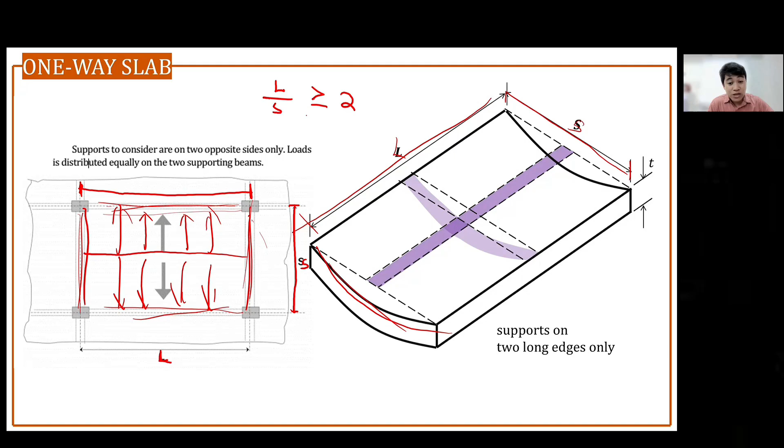Again, L over S is greater than or equal to 2. If that is less than 2, we call that a two-way slab.

My technique, to easily identify without measuring the distances, is by just looking at the panel - you can easily identify if it's a one-way slab or two-way slab. For example, you have this panel, supported on all sides by beams. All you have to do is create two squares within that panel, where the dimension of the square is the shorter span.

For example, I'll draw two squares there. Once you've drawn two squares and there's still some space left over, that is a one-way slab - the longer span is greater than the shorter span by 2. So that's the technique - by just looking at the slab panel, seeing the flooring above, you can easily identify if it's one-way or two-way slab. Check if two squares fit. If yes, that is a one-way slab.

If it doesn't fit, for example like this slab, you try to draw two squares. Here's one square - this is our slab, supported by beams. Then you try to draw two squares and if the two squares don't fit, that is a two-way slab, because the load distribution is different - it's not just one-way load distribution. If we have a two-way slab, this is the load distribution.

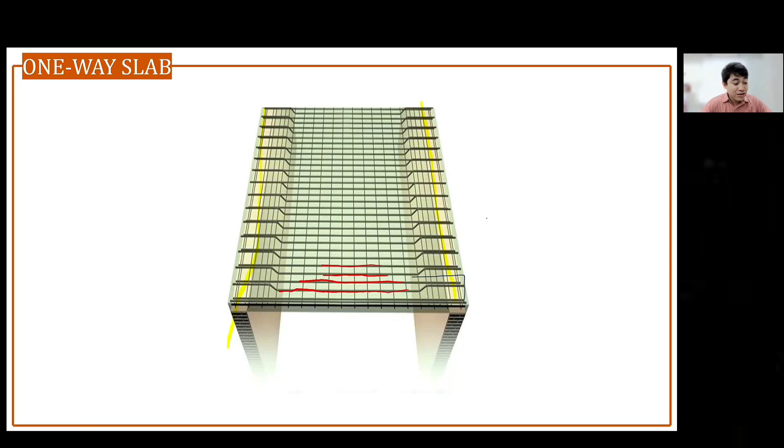This is how we put and detail the reinforcement in our one-way slab. As we can see here, this is what we design - the main reinforcement. As we cut this section, or as we cut this section, we can observe that the main reinforcement is located at the bottom.

However, if you are going to cut this section at the support, you can observe that the reinforcement is located at the top. Why? Because a slab behaves as a beam - same behavior. You'll see it deflects like this. From our understanding of reinforced concrete beams, when it deforms like that, the tension is at the bottom, so you have to provide reinforcement at the bottom.

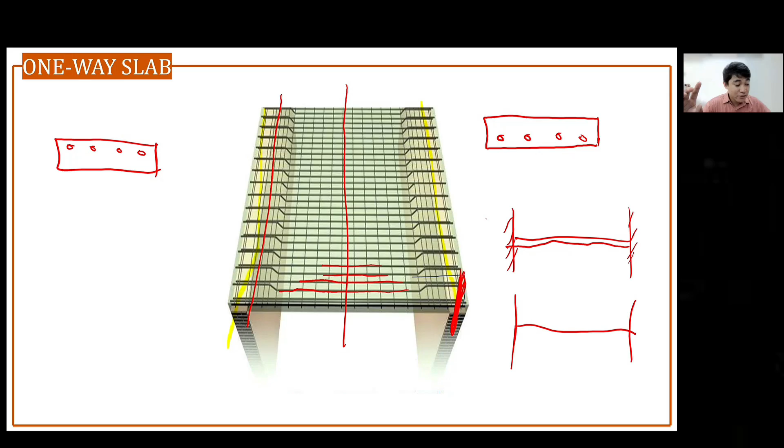At the support, if that is continuous on both sides, it's not simply supported, thus it will act as a fixed support if it's rigid. So for a fixed support, let's say we have this beam - this is the moment diagram of that beam. Negative at the support, negative at the support, and positive at midspan. For a positive moment, this is the deflected shape - the beam is happy. For a negative moment, the beam is sad.

So that's why we provide the reinforcement at the top - top sa support, bottom sa midspan. Similar to the beam behavior. Actually, we're just analyzing here a beam na sobrang haba, as you cut this section parallel to the longer side, para kang nag-a-analyze ng beam na sobrang haba ng kanyang width.

And then you have the total depth of the slab, which is the thickness of the slab. So our goal here is to identify the thickness of the slab and the main reinforcement na dapat natin gamitin for this slab. And this main reinforcement, hindi bilang ang tinitignan natin, the spacing - the uniform spacing of this main reinforcement.

Now let's try to solve this sample problem. So we have here a floor system shown, support the given pressure loads using approximate analysis. Later on, I'll explain what is approximate analysis. For the design loads, design all one-way slab with S1 bounded by the grid CD. Fortunately, these are all one-way slab because if we are going to calculate the L over S of this slab, 8 over 3, that is more than 2.

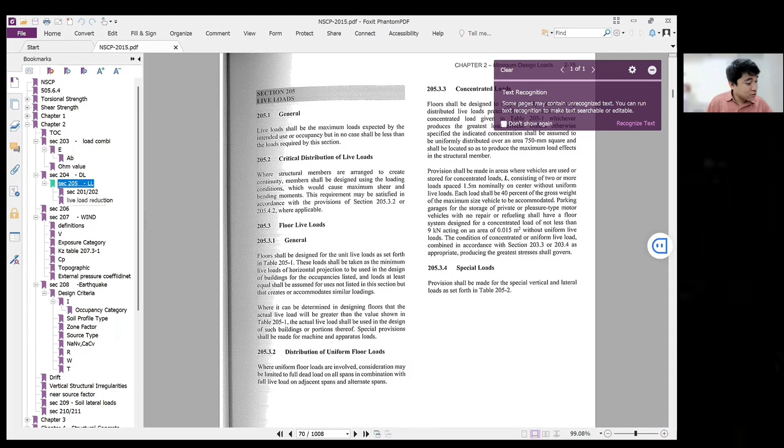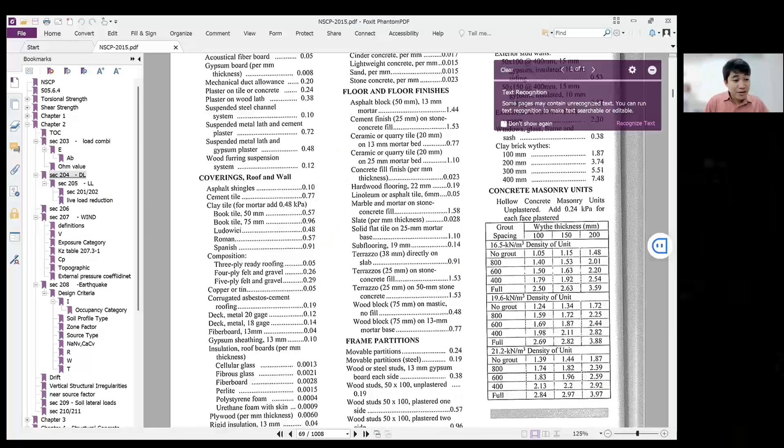Meron tayong section 204, the dead loads of the NSCP. Halimbawa, the finishes na ginagamit natin - dito yan, the floor finish. Let's say you use asphalt block on your floor finish, your cement finish, 25 mm on stone concrete fill, ceramic quarry tile, you use tiles. So you use ceramic or quarry tile on 25 millimeter mortar bed. If I'm not mistaken, yun natin ginamit ko dito for the floor finish - tiles. So you can use 1.1 or kung ano man yung specific na gagamitin mo doon sa slab mo, kung ano mismong finish.

So, you have the ceiling. Nandito yan, yung mga ceiling weight. Let's say you're going to use gypsum board per millimeter of thickness, kung ano man yung gypsum board na gagamitin mo. So, you multiply it to the thickness, so you have the load in kilopascal. These are in pressure loads, evenly distributed on the entire slab.

Next we have the electromechanical, though it is not particularly identified doon sa NSCP natin. So, this is the usual value of electrical and mechanical ducts na pwede nating ilagay dito. Usually ranges from 0.2 to 0.5 kilopascal, pero depende pa rin yan doon sa type ng structure na gagamitin niyo.

So, 0.2 kilopascal is a reasonable value. Concrete unit weight is mentioned in the NSCP, in kilonewton per cubic meter. The slab is concrete, so it has its own self-weight. As mentioned in the NSCP, the unit weight of reinforced concrete, stone, including gravel, is 23.6. I used 24 kilonewton per cubic meter in the problem.

Then you have the live load. If you're not sure what the purpose of the area is, you have to check the architectural plan to see the purpose of your slab area. So you go to the live load table and identify what the area is for.

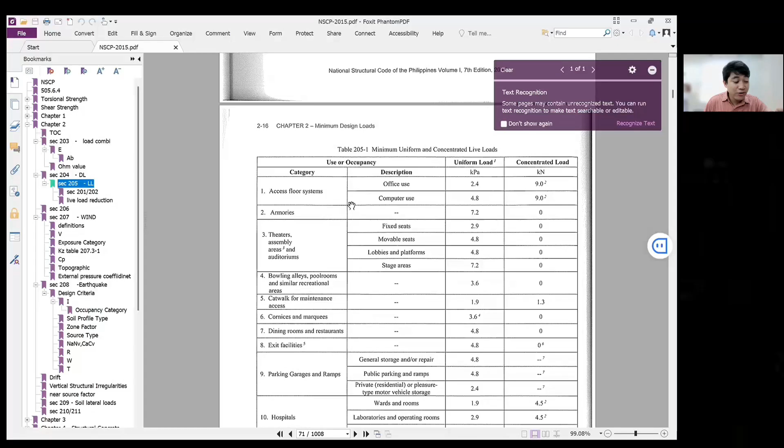For example, if we are designing a hospital, for wards or rooms, you have to put 1.9 kilopascal live load. This is the live load, the moving loads that are not permanently attached to the structure. Dead load is permanently attached, like the self-weight of concrete, the tiles, the ceiling, the electromechanical - those are dead load. But live loads are not permanently attached to the structure.

So check the NSCP for the values. For laboratories, it's 2.9 kilopascal. So that's how it works - we used 2.4 kilopascal here. The beam size given is 300 millimeters by 600 millimeters.

So now, how do we start our design? First, let's identify the minimum thickness required by the code for a one-way slab. So how can we identify the minimum thickness?

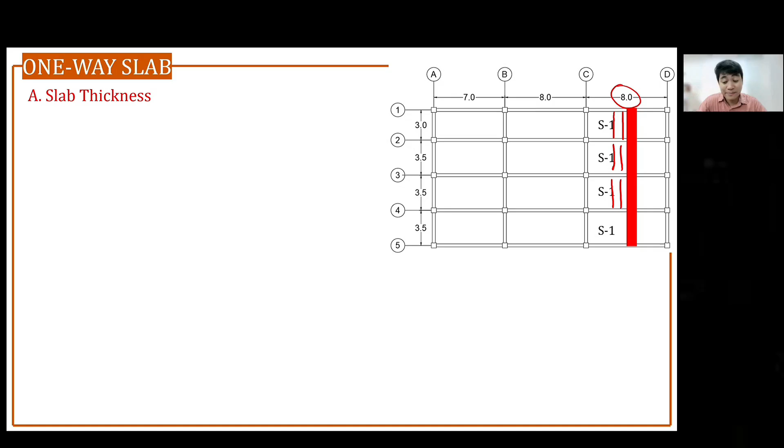Let's get a strip - this will be our reference, a strip parallel to the shorter span. So we analyze this strip. You just get a strip because that is a long slab, 8 meters. Take note, parallel to the shorter span, and that strip will be your reference for your minimum thickness H.

This is what we need, the L. So that L, if we have a simply supported slab - what do we mean by simply supported slab? A simply supported slab is a panel with no adjacent panel on both sides. Let's say this is our panel, this is the shorter span, with no adjacent panel on either side.

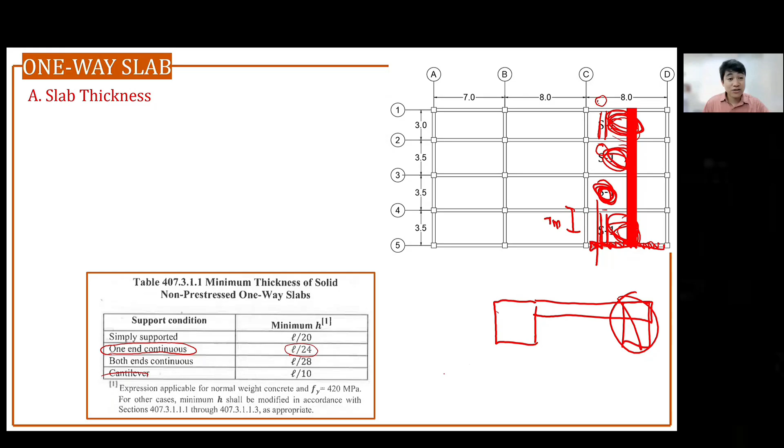This usually happens with balconies where we don't put support on the other side. But the span should be short - usually 1 meter. If it's longer, like 3.5 meters, you have to put support again or a beam on the other side because the deflection will increase. We also calculate the deflection for this, similar to a beam.

So with that, let's identify the minimum thickness of each of these slabs, starting with the one end continuous. The formula for one end continuous is L over 24. What is L? L is the length of that strip, center to center of the beam.

Okay, so that is your L. We also need the L over 28 for both end continuous, and L over 24 para dito. So let's identify, kasi parehas itong kailangan L over 24. Itong dalawang slab na to, they are just similar slab kasi parehas sila ng dimension, parehas pang continuous yung end nila, both end continuous. So isa na lang ang computation natin dito.

Parehas lang naman nabibigay ng result. However, these are discontinuous slab, ito rin ay discontinuous slab, pero magkaiba sila ng magiging L. So let's compute their thickness separately. Unahin natin to.

In millimeters to kasi thickness na makukuha mo dito should be in millimeters. So let's use millimeter na dimension for 3 meters. So that will be 3,000 divided by 24. Dito naman, that is 3,500 divided by 28. And this is 3,500 divided by 24.

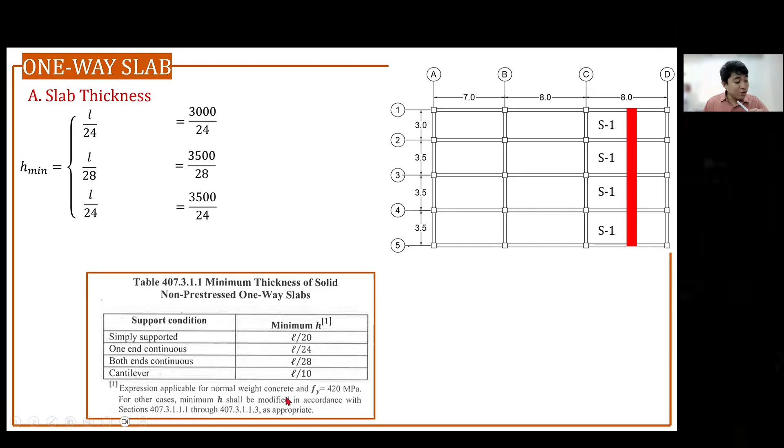Pero hindi pa natatapos yung formula natin dyan dahil may note tayo dito. So for expression applicable for normal weight of concrete and Fy of 420. However, if you are not using 420 megapascal to be exact, your H shall be modified in accordance with section 407. Ito yon, so may multiplier pa tayo, Fy other than 420 megapascal.

Ano ba yung Fy na ginamit natin? We're referring here to the main bar na gagamitin natin parallel to the short span. Take note, ha, the main bar is parallel to the short span. Yung Fy natin is 345 megapascal, hindi 420. So thus, we're going to use this multiplier, i-multiply pa natin yan dito.

Okay, so ito yung magiging final formula natin for the minimum thickness of the slab. Multiply natin, so 0.4 plus Fy over 700. Okay, so answer, pitin natin isa-isa. So we have 111.607, this one is 111.607 din, so they have the same answer. And this is 130.208 millimeters.

Okay, since we are designing the slabs here, obviously we don't want to have a slab na magkakaiba-iba yung thickness. Usually in a construction, we always want a uniform thickness sa lahat ng slab. But for exam, if we are just asked to design this slab, just focus on that slab, identify the thickness, yun lang yung focus natin. Pero kung ipinapadesign sa atin lahat to, reality kasi you have to design all the slab. Obviously, you are just going to select one uniform slab for the entire na lahat na floors. Sa second floor, sa third floor, you are going to use the similar thickness of the slab. So sa case na to, what do you think will be our uniform slab sa lahat ng panel na to na dinedesign natin?

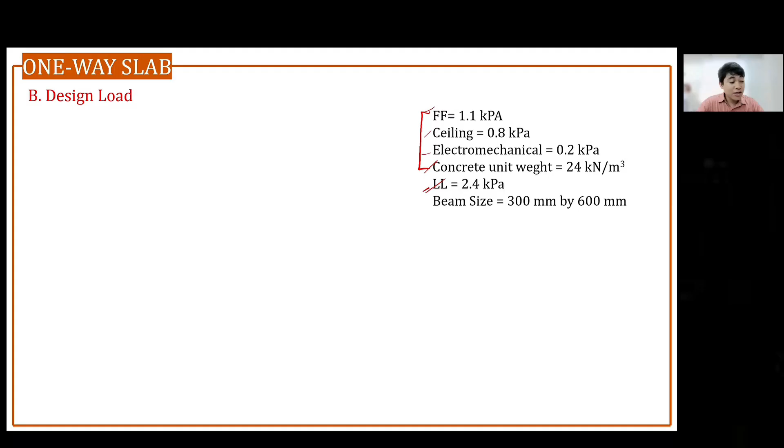We need the load. Okay, so these are the pressure loads acting on the slab. So let's separate the dead load, and these are the live loads. Okay, so let's add all the dead load, but make sure all loads must be in kilopascal. So as we can see here, 24 kilonewton per cubic meter is not in kilopascal. Naka-kilonewton per cubic meter siya, yan kasi yung bigat ng slab.

Naka per cubic meter. So let's say this is your slab. How can you make it a pressure load? So that is kilonewton, paano matatanggal yung isang dimension dyan na meter? Okay, so kilonewton per cubic meter, saan mo siya i-multiply para maging pressure load siya acting distributed or uniformly distributed on the entire area? How can we make it a distributed pressure load? So all you have to do is to multiply it by the thickness of the slab.

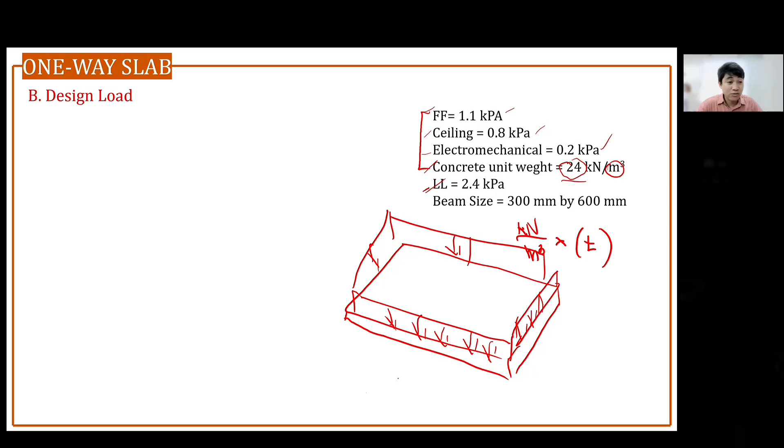Unit weight of concrete times the thickness of the slab, that is already a pressure load. Now, multiplying it with the thickness of the slab and the concrete density, we are going to convert it, since we are going to analyze a beam, we should see a uniformly distributed load. And it will deform parallel to the short span.

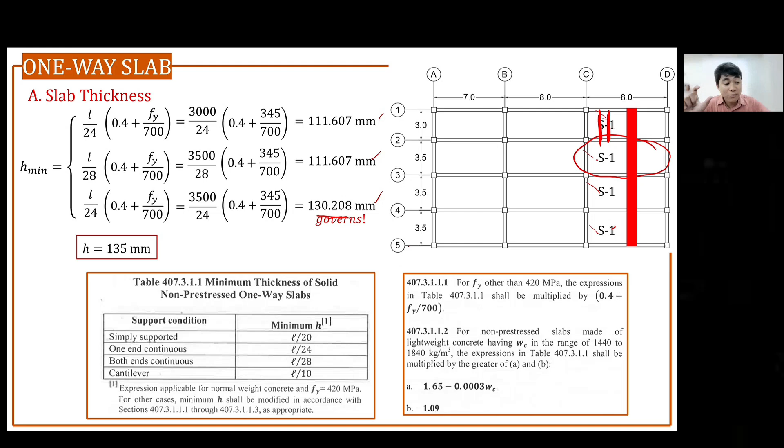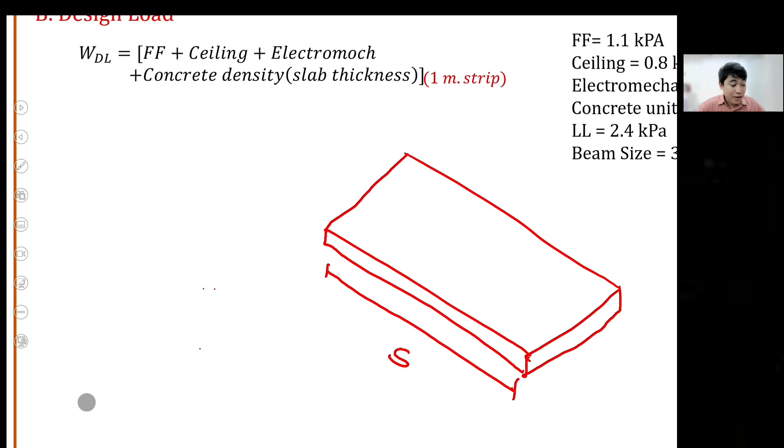Let's analyze this. So we take a 1 meter strip beam. The dimension, S, is the shorter span. The length is the shorter span, and your cross-section, this one, is 1 meter length. Now, this is loaded with pressure load. So it has pressure load there.

So how can we make it a uniformly distributed load so that if we look at the side, parallel to the shorter span, it has a uniform load in kilonewton per meter, because we will calculate moment later? It depends on the support - it's not always simply supported. So later, we will calculate the moment in kilonewton meter.

How can we convert this pressure load into kilonewton per meter? We are just going to concentrate the loads towards the center. So we concentrate the loads by multiplying it to 1 meter. Your pressure load must be multiplied to the 1 meter strip - that's why there's a multiplier of 1 meter here.

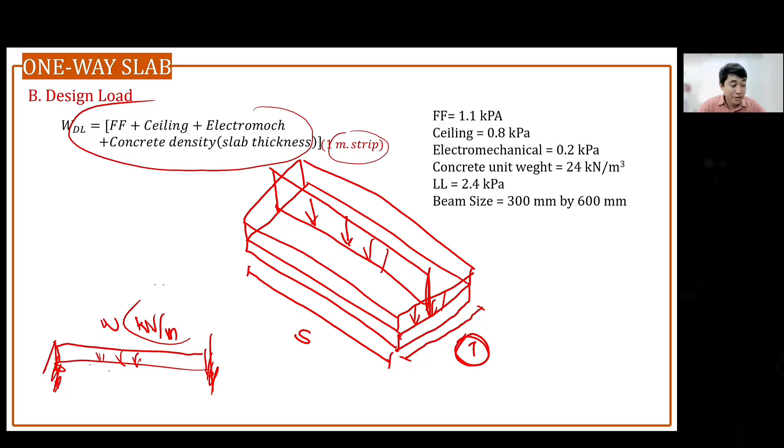Okay, let's calculate. So we have 1.1 plus 0.8 plus 0.2 plus 24. This is the floor finish, ceiling, electromechanical, and then the unit weight of concrete. Then multiply it to the thickness of the slab that we calculated earlier, times the 1 meter strip. So with that, the uniform dead load in kilonewton per meter is 5.34 kilonewton per meter.

We also have the live load - nothing to add here, that is the pressure load. Due to the live load acting on our structure, that is 2.4 kilopascal. Just convert it into kilonewton per meter by multiplying it to 1 meter strip. So our answer is 2.4 kilonewton per meter.

Since in the design of reinforced concrete, in the ultimate stress design, we always need the factored load, we have to factor these loads. We are going to use 1.4, or 1.2 dead load plus 1.6 live load, because there's another load combination too, right - the 1.4 dead load. I guess this will govern.

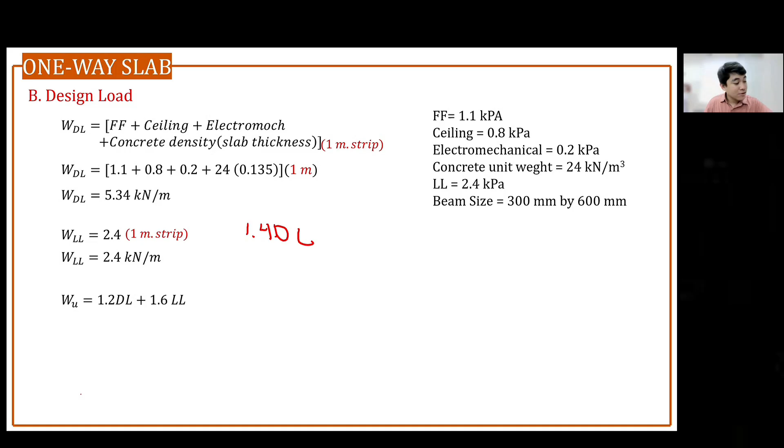Let me just check if this will be the governing load combination. Let me check if that's really the governing one. If we check the other load combination, 1.4 of dead load, so we have 2.4 that's the live load, 5.34, so this is only 7.476. However, upon checking, this is 10.248.

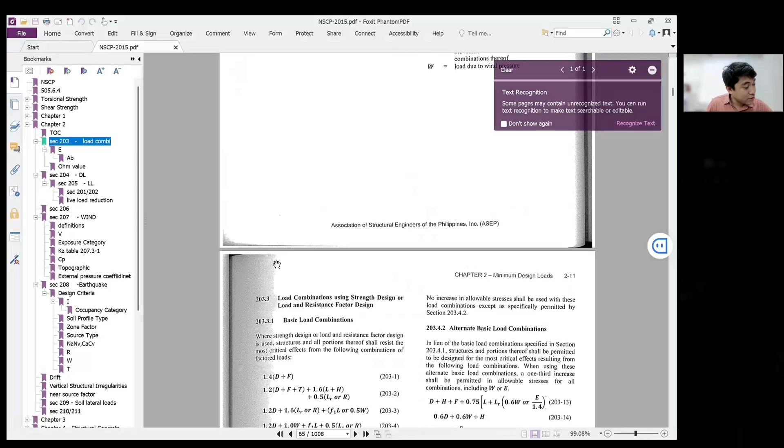Because if you have dead load and live load, these are the load combinations you can use for reinforced concrete: 1.4 dead load, then 1.2 dead load plus 1.6 live load. Obviously this load combination is higher than 1.4 dead load, so we are going to use this as the factored uniformly distributed load in kilonewton per meter.

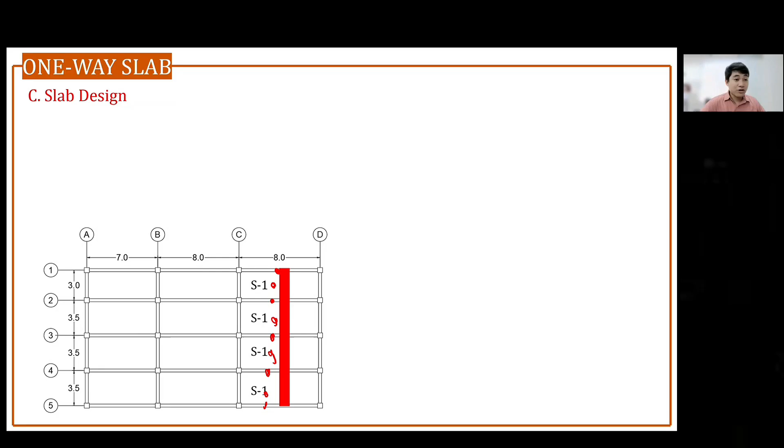Now we are going to design the slab - we already have the loads, and these are the strips we are going to consider. So we are going to use approximate analysis, because doing full structural analysis takes a long time. There are many ways to get the moments here - you can do structural analysis for accurate, finite element analysis, which is more complex. So to make it easier, we can use the approximate analysis given by the code.

All you have to do is to assume or cut this section parallel to the strip we created. If you check the cross section, this is the cross section of our slab. So how do we perform the approximate analysis? Under approximate analysis, we are solving the negative bending moment at the face of the support. The support we consider for the slab is the beam.

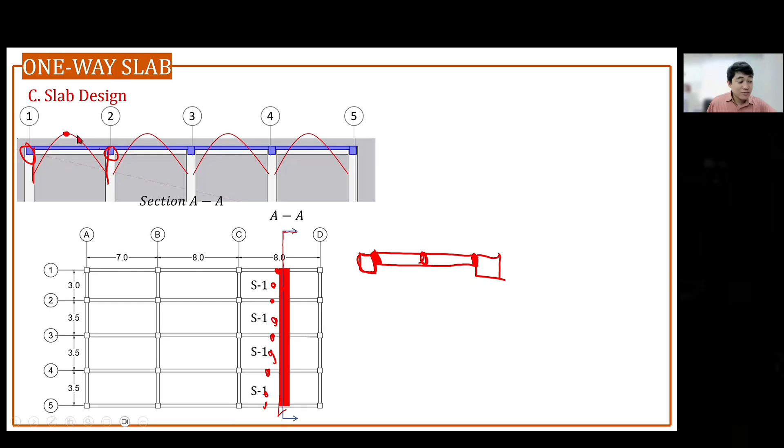So it has a support there - this is our support, this is our beam. We get the moment - this is our support, we get the moment right at the end of our slab. And at the midspan, we get the moment there. If the structure is loaded with uniform load, no other loads, no uplift force, this is the approximate moment diagram. Instead of using structural analysis or matrix analysis, you can use approximate analysis for the design of the slab.

How do we use this? This table 406.5.2 is the approximate moment for non-prestressed continuous beam and one-way slab. So this is applicable for one-way slab. How do you use this? You have the positive moment and the negative moment.

Let's focus first on the positive moment. Let's say this is your continuous span. Let's look at the positive bending moment. Okay, so we have what we call the end span and interior span. Where is the end span? Obviously, it's at the end. These are the end spans. So, the interior span is this one. We are looking at the positive moment first.

Discontinuous end, integral with support, discontinuous end, unrestrained. So there are only two things to check there. Is it your end span? This is the end span, end span. Is it with support or unrestrained?

If we say with support, for example this is our slab, there's a beam at the end. If this is our slab, it has a beam at its end. With support at its end? At the discontinuous end, we're looking at the discontinuous end. This slab, this end span, is an end span because we have 1, 2, 3, 4 spans. So this end span, this is the continuous end. This is the discontinuous end.

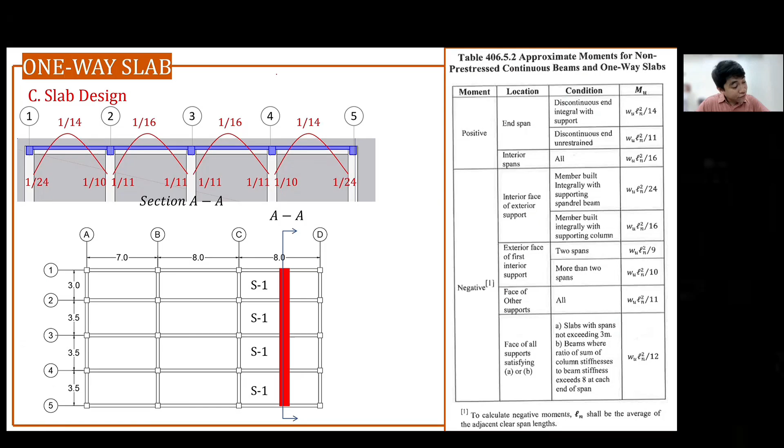Remember ang WU natin, ito yung uniformly distributed load. This one, that is 10.248. This is our WU or the factored load, that is uniform to the entire slab kasi we are assuming na para-parehas yung thickness ng slab, yung material ng slab na ginamit, ceiling, floor finish. Okay, so para-parehas na lang yung WU nila, yung uniformly distributed load.

That is 10.248 kilonewton per meter. Okay, so we are going to calculate, at may beam dimension pa rin pala tayo na binigay dito. So this is 3 meters. Pero hindi yan yung magiging LN mo, ha? Ang magiging LN mo dyan ay babawasan mo ng dimension ng biga, ng beam. Okay, yan yung kailangan ni formula. So this is 3 meters.

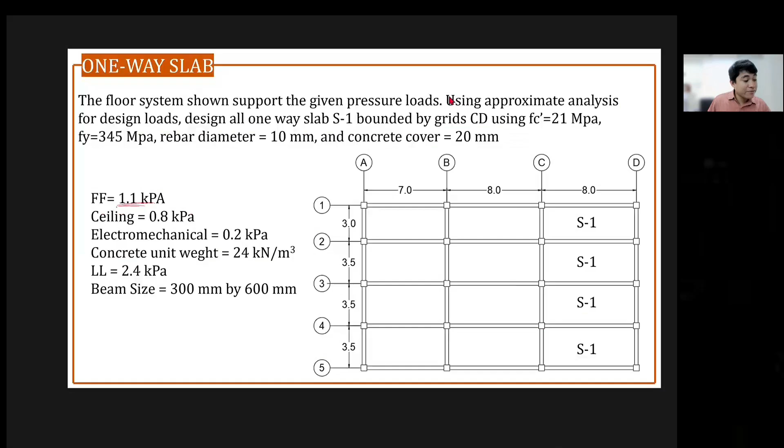So bawasan natin class, kaya given dito yung beam dimension: 300 millimeter is the width of the beam and the total depth is 600. So we are going to reduce it by 300 millimeter, both sides 150. Bawasan natin to, kalahating 150 dito, kalahati 150, kalahati 150. So total of 0.3, so this will be now 2.7 ang magiging LN, and this will be now from 3.5 magiging 3.2 na lang siya. This is also 3.2. From beam to beam, ha, not column to column.

So from beam to beam. Okay, beam to beam, kasi yun yung face ng ating slab. Okay, from beam to beam. So this is also 3.2. This is equal to, this is 3.5 meters, 3.2 rin. Okay, now let's see kung ano yung magiging value ng moment nila.

So all you have to do is to follow the formula WU ln squared. So for example, 1/14. So WU, 10.248, LN natin is 2.7 squared over the denominator na 14. So we have 5.336. Let's see kung tama. Yan, tama, positive, kasi ito yung isang span natin, slab na 2.7 meters. Ito yung nasa positive tayo, sa gitna, 5.336. Okay, para sa gitna.

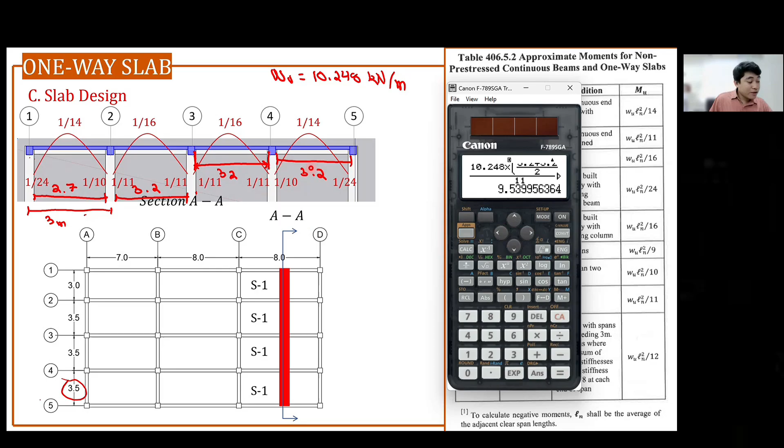Let's check, grid 4 of 3,4. So we have 9 point... 9.540. So you calculate all the moments.

So these are the flexural moments acting on our beam. Okay, so now we have the moment, class. We can now proceed to design.

Anyway, before we proceed with the design of reinforcement, do you have any questions, guys, for solving these moments? Is that clear, solving the moments? Can I see a thumbs up if that's clear, guys? Okay, how about the others?

Okay, we now have the value of moment. So it's like you analyzed a beam that has moment. Just after that, how do you analyze further? Okay, so how can we compute this?

Actually, I use here a formula, so let me just derive the formula again. I believe I discussed the two solutions in solving the required area in the analysis of beams. Let me just recall that analysis.

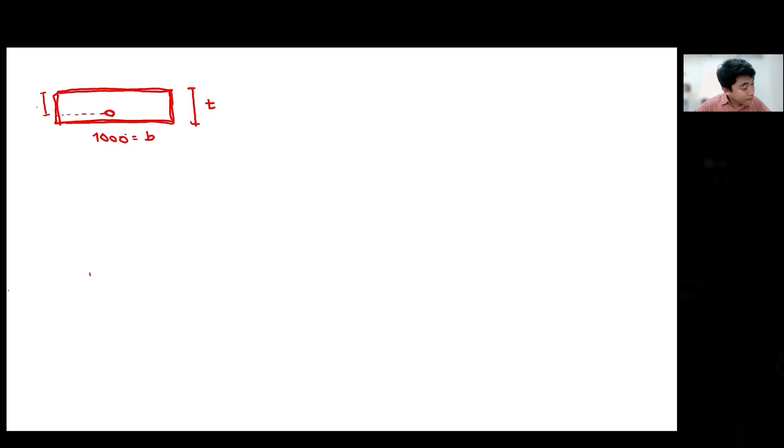Okay, and this, let's say it's the negative bending moment we're answering. This is your effective depth. The stress-strain diagram is still the same, class. If we draw the stress-strain diagram, it's still the same — we have the stress-strain diagram, we have the stress diagram.

So that's 0.85 FC prime, and then you have the compression. Compression force is 0.85 FC prime times A times B, and you have the tension. Since we are designing, we use the yielding stress, AS FY. So we calculate C equals T. From C equals T, you want to solve for AS, but unfortunately, you don't have the value of A yet.

Before you get there, you need to solve the value of A first by taking the value of moment. So you have the moment capacity, and you just equate it to the nominal moment or the design moment capacity. The reduction factor for design is 0.9. So moment equals force (compression) times distance. We use compression force 0.85 FC prime AB, and the distance between the two forces is D minus A over 2. So you get the moment.

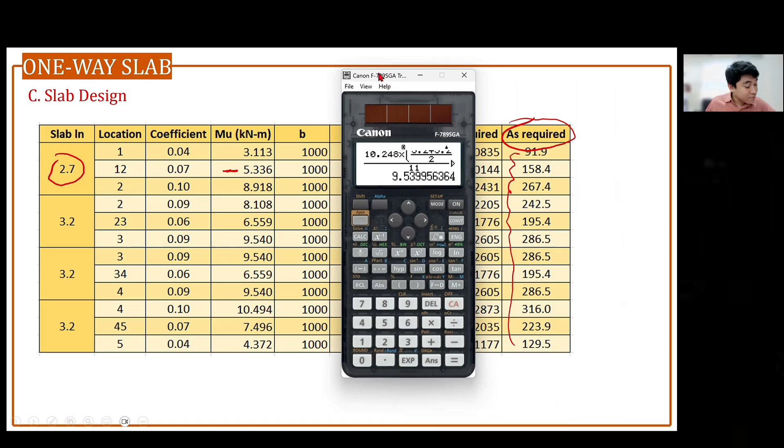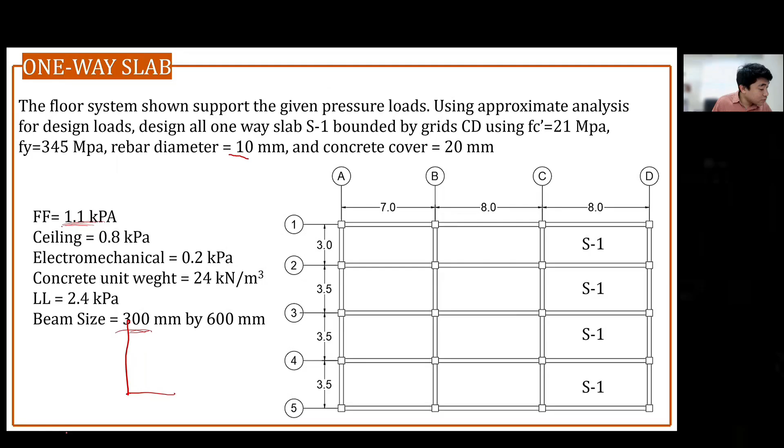Okay, there are no stirrups to pass through. We don't have any stirrups here for the slab. So: 135 minus 20 minus 10 over 2. This will now be your effective depth, 110 millimeters. That's why 110 mm is what's written here.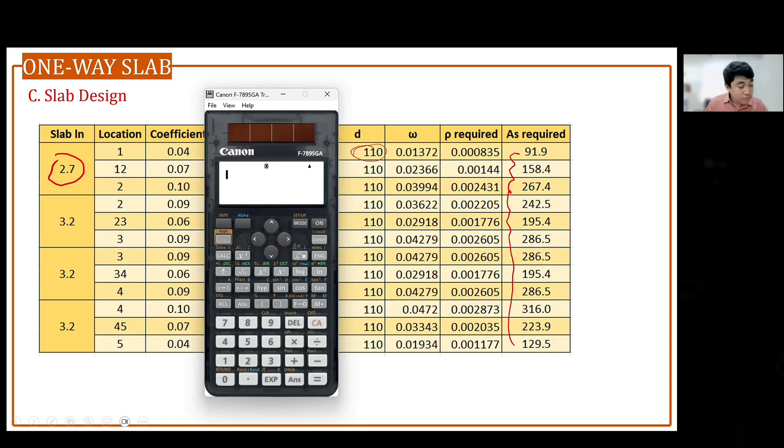Okay, so next, we'll just prove that this is our required AS. So we have 3.113 times 10 raised to 3, 6 rather, since it's in Newton-mm.

So it should be 0.9 moment. This is what we derived. This is our procedure, class: get C first. We equate the force to the factored moment. We have the distance D minus A over 2, and 0.85 of FC prime.

The FC prime here is given; we'll use 21 megapascal. We don't yet know the depth of the compression block. The width of the slab is set to 1,000 millimeter. Take note of that - always use 1,000 millimeter for the width of the slab we're analyzing, since it's a 1 meter strip.

Then the effective depth is 110 minus A over 2. With that, we can solve for the depth of the compression block. Let's say around 50, half of that. So the depth of compression block is equal to...

Is the typing correct? Oops, it looks too small. 0.9, 0.85 FC, D minus A over 2. Okay, so we have that value. Alright, let's store that. This is the value of A.

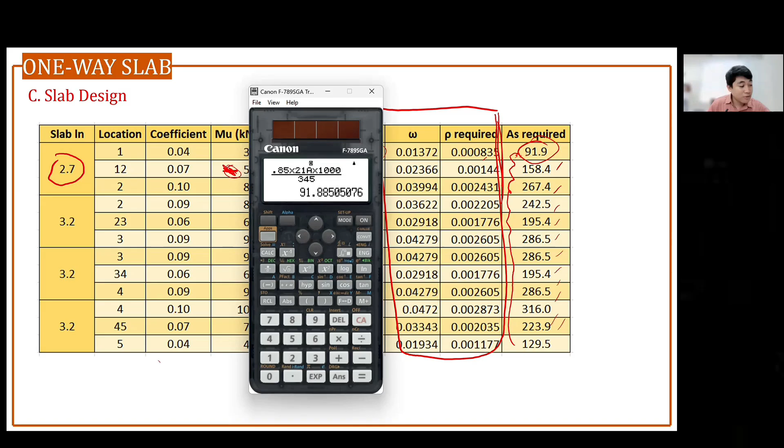Ang gagawin mo na lang dyan, pwede kang gumamit ng Excel result. If you have a lot of slabs to be designed, puro one-way slab, input mo lang yung moment mo. Similar na yan ang formula, similar ka naman kasi ng thickness eh.

If you can observe, pwede may isalpak dito, no? Halimbawa yung AS yung sinosolve mo dyan, tapos AS equals 0.85 FC prime AB over FY. Tapos yung AB, dito, galing dito. Solve mo yung A dyan.

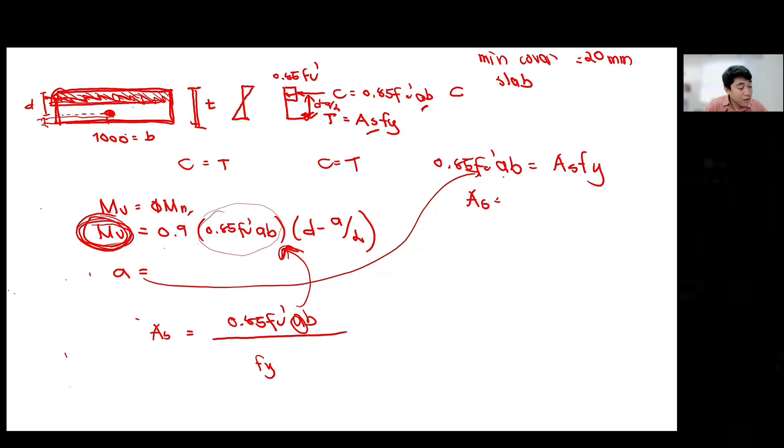Ito lang naman nagbabago eh, moment lang, bago-bago lang yung moment. Pare-parehas yung beam mo, yung width ng beam kasi you are considering 1 meter strip. Pare-parehas yung magiging effective depth mo kasi you are considering similar thickness of the slab. So magbabago yung moment, magbabago yung AS, depende yung moment natin. Magbibigay siya ng required area of steel, but you have to check if this required area of steel is greater than the minimum requirement of the code.

Okay, balik tayo dito. Hindi ko na iisa-isahin to, class, check nyo na lang kung tama yung nakuha dito. Ayan, yung mga required na yan, pare-pareho lang naman kasi yung solution, parang nagde-design ka lang ng beam na lagi siyang mag-yield.

Ito lang yung kagandahan dito, laging siyang mag-yield, di mo na kailangan i-check yung C compared sa C-max. Maraming way kung para malaman kung singly or doubly. You may compute the maximum moment na capacity ng singly reinforced beam, pero hindi mo na kailangan gawin yon, kasi lagi namang nasa tension control section ang slab, dahil ang liit ng compression block nito.

Anyway, we have to check the minimum area of steel of the slab as mentioned by the code. For the one-way slab, the minimum AS is 0.002 times area ng gross, kung meron kang deformed bars o FY na gagamitin natin na steel bar na less than 420 megapascal. Sa given na to, we are using 345 megapascal of FY, so we are going to use this formula. If not, use the other formula, kung ano man yung greater dito sa dalawa na to.

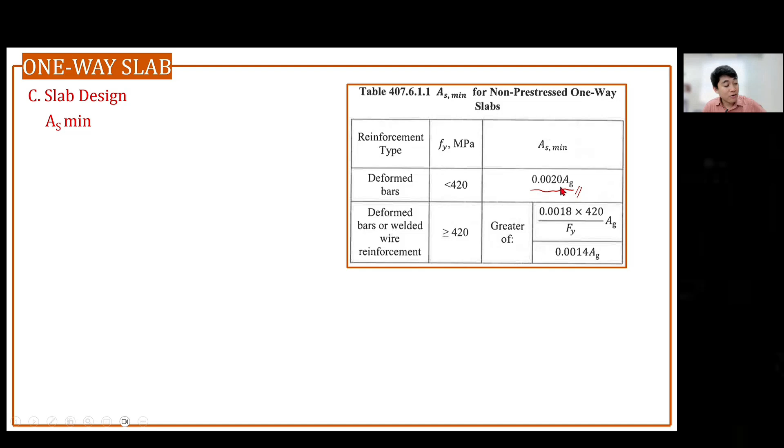Since ang ginagamit natin is 345 megapascal, we'll be using this formula for the AS minimum, 0.002 times area ng gross. Ano yung area ng gross? Again, we are analyzing a 1 meter strip, so this is 1,000 millimeter, and you have the thickness of the slab of 135. When we say gross, you're looking at this cross section, 1,000 by 135, so that will be your AS minimum.

So let's see kung ano magiging value niyan. 0.002 of 1,000 by 135, this is in millimeters, so the minimum requirement is 270. Ilagay natin dito ito yung mga na-solve natin individually, every type of moment, so we have a required AS and this is the AS minimum. We're just looking at the governing AS, okay, governing area of steel, so of course larger value will govern, 270 dito, 270, ganyan talaga class ang sa design ng slab.

Na laging minimum ang nag-govern, especially yung mga slab na magbababa lang yung kine-carry na loads. Halimbawa dito, 2.4 kilopascal, mababa lang yung live load niyan eh. Sa mga storage facilities, yung matataas na live load, doon na nag-govern yung AS required. Pero dito, meron naman katulad ng beam na to, itong slab na to, 286 yung nag-govern na required. But mostly talaga for the design of the slab, especially pag residential, pag lang kasi yung slab na 1.9 kilopascal yung live load, AS minimum lagi yung nag-govern.

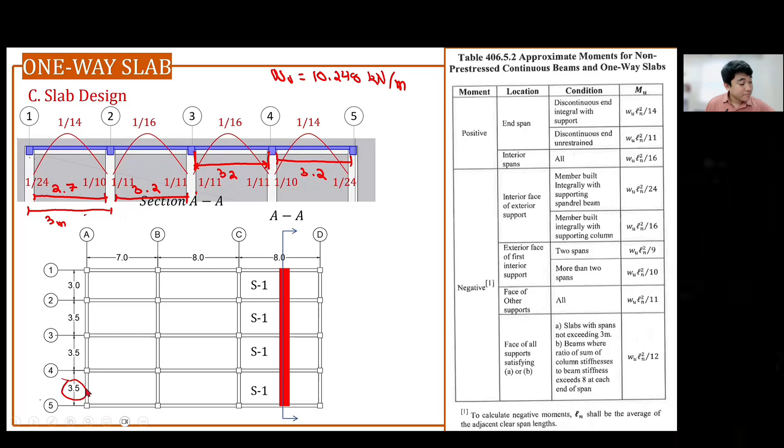Dahil 3.2 ang length niya, 3.2 rin yung katabi niya, so yung nag-average sila, mataas talaga. Tapos yung coefficient mo, 1/10, 10 yung denominator mo, compare mo sa 14 tsaka 24, lalaki talaga yung moment. Kasi ito class ay continuous beam pa, may kadugtong, so nagre-require siya ng mataas na negative bending moment. Nakadepende naman yung AS mo sa negative moment natin.

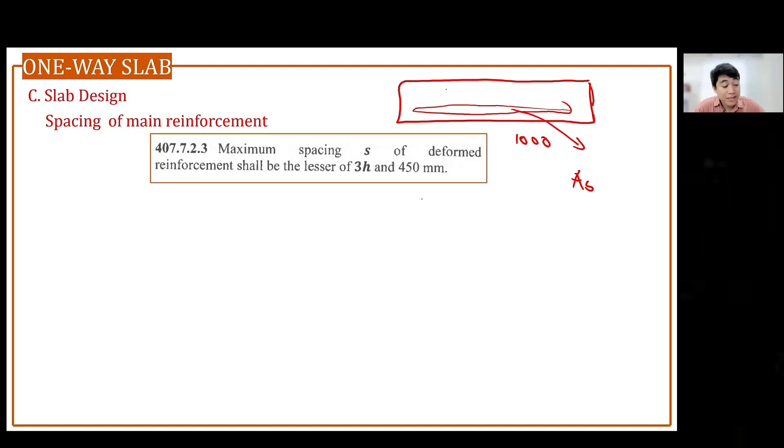Remember, we calculate the number of bars by AS over area of bars. Now this means this is the number of bars in your 1 meter length. Now we'll determine their spacing. So technically, class, all you have to do is get the N.

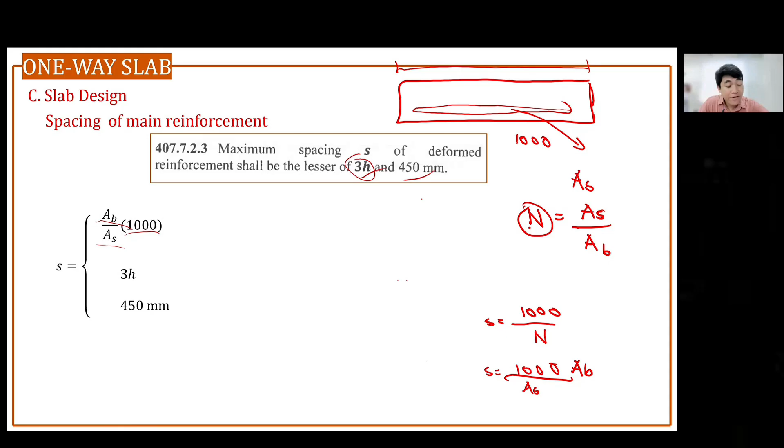So let's check the 3H and 450. Remember, H is the thickness of the slab, which we computed earlier as 135. Let's check that. Let's compute the area of the bar. We are using 10 millimeter diameter main bars per slab.

So, 10 square pi over 4 over 316 times 1,000, because we are considering a 1,000 millimeter or 1 meter strip. This is 248.544. 3 times H is 405, and then you have 450 here. So with that, obviously we are going to select the smallest value.

The smallest value, because that's the safest. So this will be our spacing of the slab, the spacing parallel to the short span. So that's what we'll use for the support and mid-span spacing: 245. Usually, this is how we create a schedule of slab.

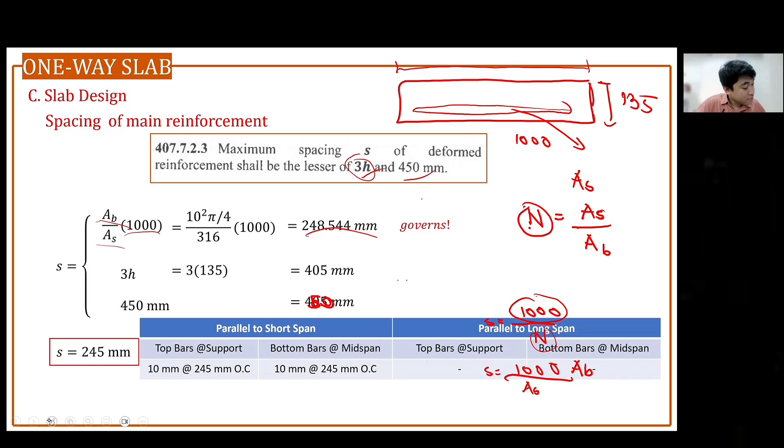So, parallel to the short span, our top bars is 10 millimeters. Bottom bars, also parallel to the short span. Top bars are at the support, 245. Bottom bars are at the mid-span.

Just to show you a sample, another way of showing the schedule of reinforcement for our slab. Parallel to the long span, we don't have main bars designed based on moment. It's based only on temperature bars, so that's why it's left blank there.

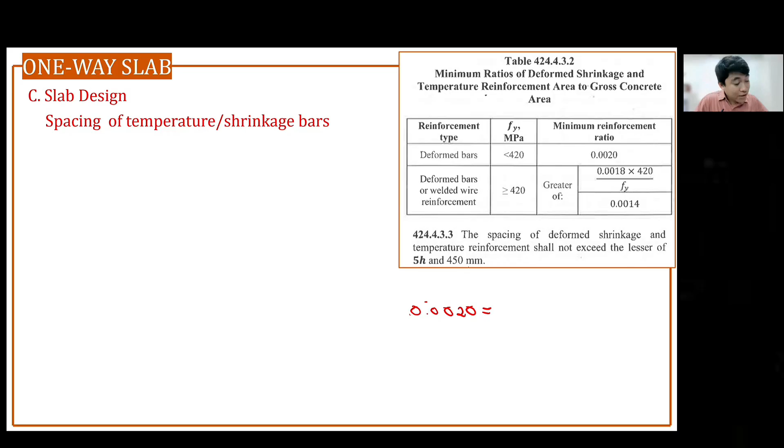The minimum ratio of the shrinkage and temperature reinforcement area to gross concrete area is shown in this table. It says you don't need to compute bending moment - it's based only on the minimum requirement of the code. The minimum ratio is 0.002, the ratio of temperature reinforcement AS temp over area of gross.

So basically, as we said, AS of temperature is equal to 0.002 times area of gross. It's almost the same as the formula for our minimum reinforcement, but that one is section 407.6.1.1, while this is 424.4.3.2 - they're different provisions. This is 424, temperature reinforcement.

So that's the formula we'll use: AS minimum for temperature, parallel to the longer span, is 0.002 times area of the gross. For area of gross, we still consider 1,000 millimeters, since we're providing reinforcement parallel to the longer span, so we'll use a 1 meter strip for the area of the gross.

But again, you don't need to calculate any bending moment parallel to the longer span - we only needed that moment earlier for parallel to the shorter span. Just remember we need 1,000 for the width for our area of gross, which is 1,000 times the thickness, almost similar to before, but this is for temperature bars.

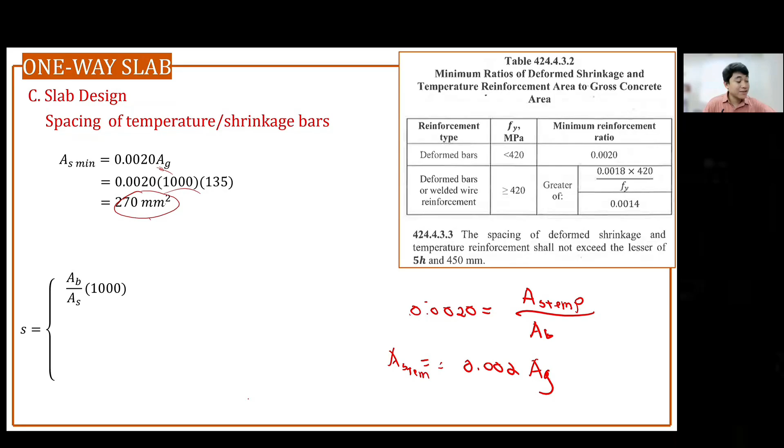So that's it, we have nothing to compare there. We'll just solve for the required spacing using a similar formula, since we want to identify the number of bars for the area of bars per 1,000 millimeters. This is the same formula we derived earlier for calculating spacing. But compared to the main bars, this uses 5H instead of 3H.

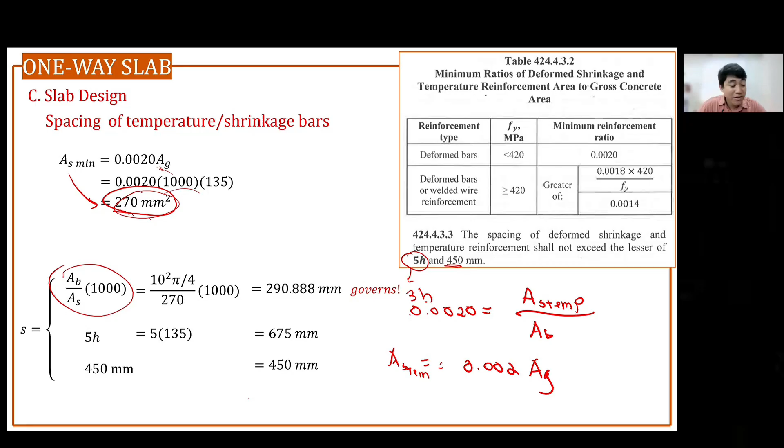So it's 5H and 450mm. This equals 290, and this is 675 - obviously you select the smallest value here, so this one governs. We round for uniformity of our answer - if asked to identify the value in whole numbers, we round down to the nearest 5 millimeters. So your answer is 290, like our earlier answer of 248 which we rounded down to 245, since rounding down gives the safer spacing.

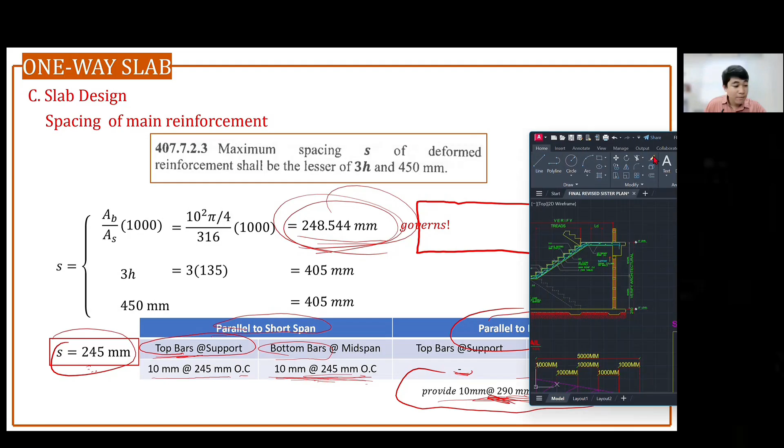Hindi ko siya malipat. Okay, so this is a sample of schedule of slab. So, meron tayo ditong top. May actually kahit tanggalin mo na tong bottom na to. Okay, so for at support, ito lang naman talaga yung requirement. At support, ito lang ang requirement natin yung top bars. Pero ito kasi hindi siya naka-bend up.

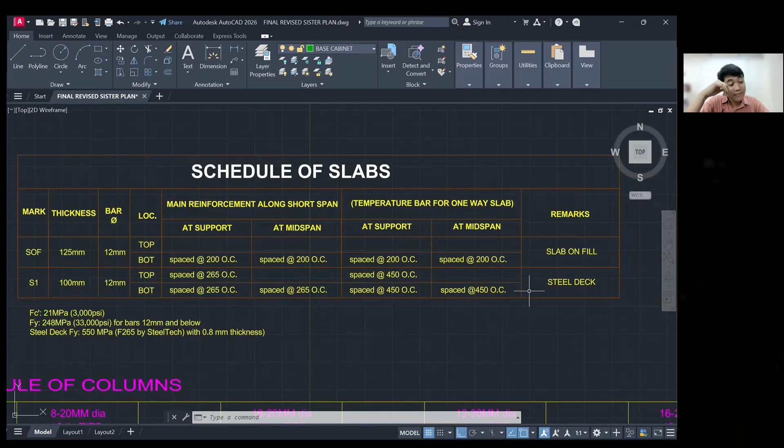So yung schedule dito ay nakita nyo tong sample dito. Parang ganito yung orientation ng bakal. Dinedire-diretso na lang instead na i-bend up siya, dinedire-diretso na lang sa baba para hindi na nagbe-bend. Pwedeng ganun schedule. Okay. Kasi ito ay nakaano ako dito steel deck. Usually hindi na siya binebend. Pinapattern na lang siya dun sa steel deck. Okay. So, ayun.

That's how, basta the important is dapat meron ka ditong bakal sa support sa bottom, ito yung na-design mo, and then sa top naman. Okay. Kung ayaw mo i-bend yan, pwede mo idedire-diretso to, tapos mangyari dyan, ayaw mo i-bend up yan, idedire-diretso mo to, tapos itong bakal mo sa taas, maglalagay ka pa rin. Mga putol lang na bakal. Putol na bakal to. Yan. Para hindi ka na mag-bend.

Okay. So ito, idedire-diretso mo sila. Tapos ito, putol siya. Okay, so anong length niyan, sir? So, as per code, ito meron ditong guide for slab. So, L over 4, no? L over 4 for continuous slab. So, yung mga cut dito, L over 4. Kasi sa L over 4, yung moment diyan is near to zero na. Hindi mo naman na kailangan ng bakal sa ano, 'di ba? Sa zero yung moment. Theoretically, hindi mo kailangan ng bakal diyan.

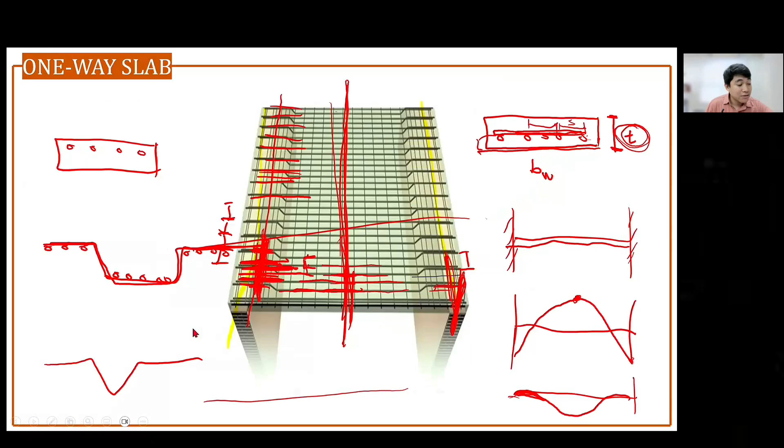So that's how we design. So madali lang mag-design class ng slab as long as you have the value of moment. Parang beam lang siya. Okay?

So ang final answer natin, this one. Oh, yan. We use uniform spacing for mid-span and support for the entire slabs na yan. Yung one-way slabs na nakita natin doon sa sample problem. But sa exam natin, if kung ano lang yung tinanong, for example, design the mid-span, design the support, so magkaiba yung sagot doon, class ha? Okay. Tinanong lang yung mid-span na spacing, okay, mid-span na support, support na spacing. So, magkaiba yung sagot natin doon, class. Parang isosolve niya isa-isa. Halimbawa...

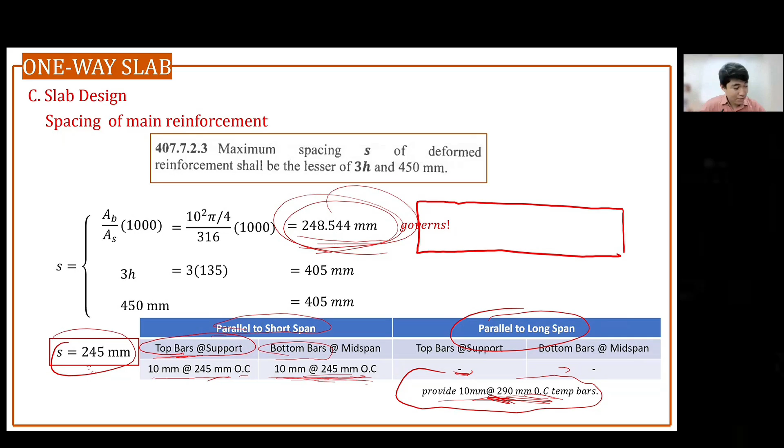Dito. So, halimbawa, ito, pinadesign sa inyo to. Yan. So, ito yung determine the spacing at the support. So, support top bars yun, no? Determine the spacing at the support. So, iba yung spacing mo dyan. Dito, kasi 270 square millimeter to eh. Ito, 286 AS. So, magkaiba yung magiging spacing mo dyan.

So, ganun yung mangyayari sa exam natin. No? Hindi natin i-generalize. Dito kasi generalize natin. Which is yung nangyayari sa actual. No? Isahan na lang para madali siyang i-layout. No? Hindi siya mahirap gawin sa site. So, hindi naman ganun masyadong kalaki yung difference nun when it comes to the spacing.

Eh, imagine mo, no? 270 lang. 170, 380. Yan. And like sa beam, di ba? Ang tataas ng AS dyan eh. Abot ng 1,000. Yung mga AS natin dyan sa beam. So, yun. So, pag nilayout natin siya, ganito siya, guys. Yung main bars natin, mga nakabangka sila. Ang tawag dyan ng iba, nakabangka. Kasi ito yung temperature bars.

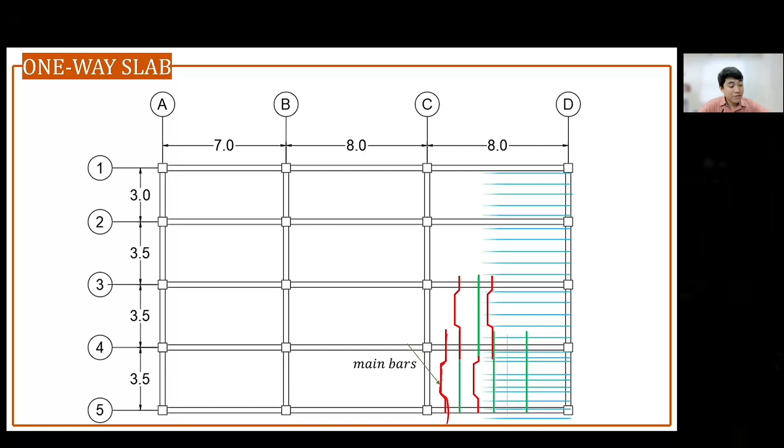Let's try to solve this problem. Now, this is actually a passed exam problem, November 2019. The figure shows a one-way slab having a total depth of 200 millimeter with a 25 millimeter concrete cover. Again, if not mentioned yung concrete cover, anong gagamitin natin? If not mentioned, what is the minimum concrete cover for the slab? So that is what? Okay, 20 mm. No? If not mentioned sa problem, use 20 mm.

Clear covering at the bottom, the steel reinforcement is 20 millimeter diameter. Spacing of steel reinforcement is 125 millimeter on centers. FC prime is 30. Considering 1 meter width of the slab, determine the moment capacity of the slab strip. Okay? So, 125 yung spacing nila. Yan. Okay, clear cover and total depth is of 200 millimeters.

Okay? So, let's compare siyang analysis, baliktad lang, no? So, given yung spacing, so with that, di ba kaya nating solve yung AS? Solve natin yung AS, given the spacing. AS, ano nga, di ba, we were able to derive earlier a formula that S is equal to AB times 1,000 over AS. So, with that, masasolve mo yung AS.

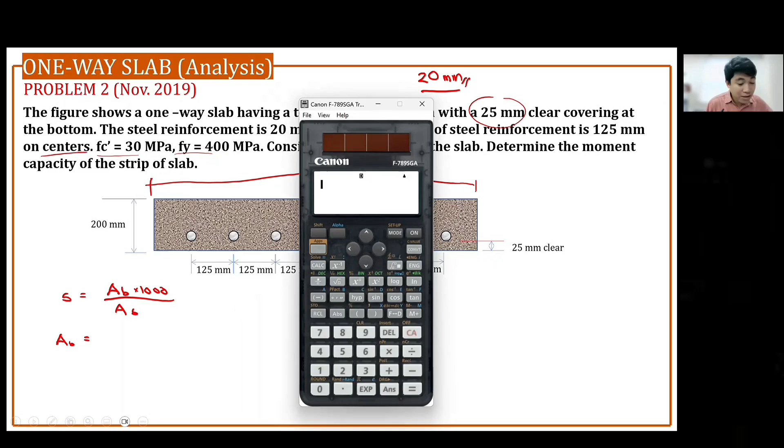Diba? So, AS, solve natin. We have AB, area ng bars to. So, area ng bar na gagamitin, individual area. So, we have 20 square, that is 20 millimeter diameter, pi over 4 times 1,000 over AS. Over S. Spacing natin is 125. Center to center spacing pala yun, nako-compute natin. Not clear spacing. Center to center. So, ang may AS natin dito is 800 pi. Okay, so that is 800 pi. Let's store this value at A na lang.

800 pi. Tama ba? Let's check. 2513. Yeah, tama.

After that, pwede tayo mag-C is equal to T para makuha yung value ng A. So, C is equal to T, compression 0.85 FC prime AB is equal to AS FY. So, with that, we can solve the value of A.

Okay, so we have the AS FY. AS is stored at A times FY. We use 400 megapascal over 0.85, FC prime is 30 megapascal times A. We are solving value of A pala, times B na, again, considering 1 meter strip.

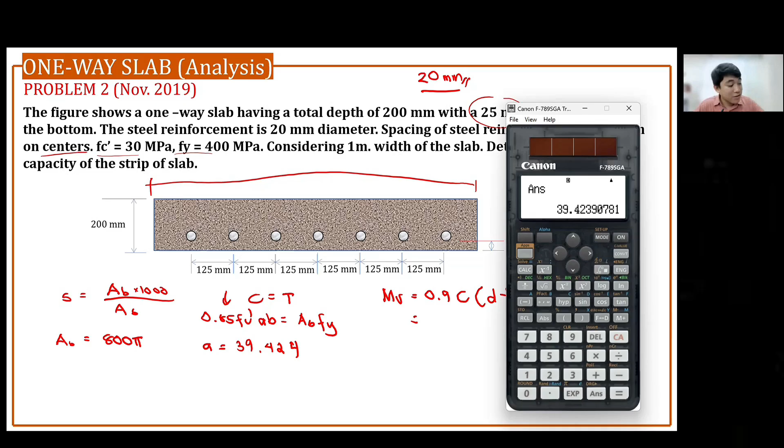Okay, this is hindi situational, noong board exam 2019. Isang tanong lang tungkol sa slab. So, 0.9 times reduction factor since we are — bakit mo sir nasabi na 0.9 agad yung reduction factor? Diba this is analysis, we have to check kung saan siya magfo-fall, sa tension control section or compression control. So, we have to check the value of the strain. Kahit wag na strain eh.

Yung C na lang versus the Cmax — remember that? Tirahin natin, C over D, wala pa pala tayong effective depth. Check natin yung C natin dito, lalampas ng Cmax. Kasi diba pag hindi lumampas ng Cmax, tension controlled na yon. Okay, doon sa 3 over 8 ng D para mas mabilis yung pang-comparison, instead na mag-strain pa tayo.

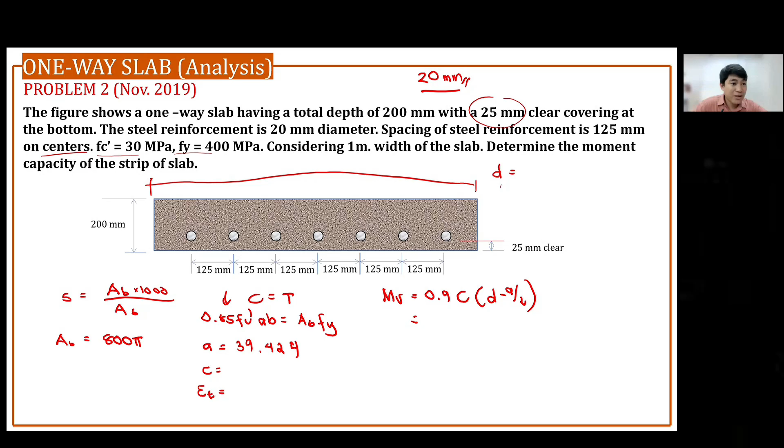Pwede naman, strain din, lalampas siya. Sige, strain na lang. Solve natin yung C tapos yung ET. Lalampas siya ng 0.005, kasi nga one-way slab to. Ang taas ng compression block.

Pwede mo lang skip yung reduction factor, alam mo na agad na 0.9 yan, tension control. Anyway, let's solve first the effective depth.

200 minus the concrete cover, 25, minus the diameter of the bar over 2. Okay, that is 20 mm diameter of the bar. So that the effective depth, 200 minus 25 minus 20 over 2 — the answer is 165. Okay.

So let's solve the value of C. Dito yung A. Tapos, yung beta pala natin ay iba kasi this is 30 megapascal. Let's solve the beta. 0.85. I believe you still remember the formula. 0.85 minus 0.05 over 7 ng 30 minus 28 megapascal. So, the value of beta is equal to 0.83. Or lang natin sa C.

So, A is equal to beta C. A over beta — this is your C, 47.174 millimeters.

So, let's see. Ito, meron naman ako dito complete solution, guys. Pero hindi ko na pala kailangan yung C dito. Diretso ko sa 0.9. Check ko lang yung ET natin, ha? Okay, so ET, ano nga formula ng ET?

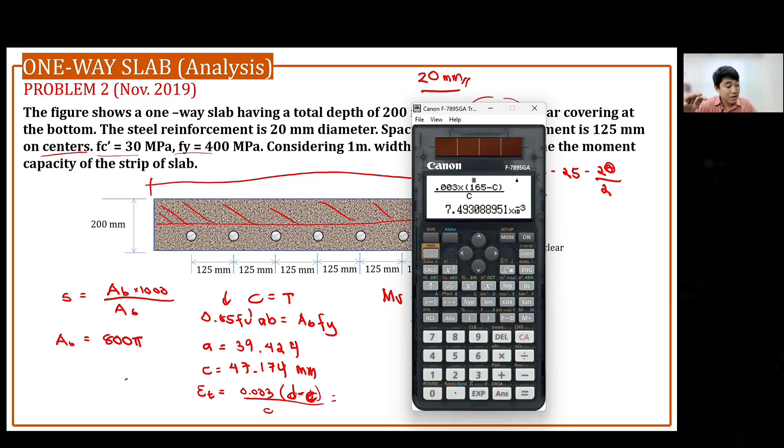0.007, greater than 0.005, meaning this is tension control section, thus the reduction factor is 0.9. Okay, so kailangan mag-proceed ka na dito. So pag nag-analyze ka ng slab, para kang nagde-design na laging 0.9 na reduction factor in plus. Kaya 0.9 to ang reduction factor dito.

So going back, we proved na 0.9 nga ang reduction factor. Balik tayo dito sa pag-compute ng moment, times 0.85 ng FC prime 30 megapascal, 0.85 FC prime A, store natin sa B yan. A, B is 1,000 mm, B, 165 minus A over 2. So times natin 10 to the negative 6 para maging kilonewton meter. So, the moment capacity, malaki no?

131 — tama ba yun? Tama. 131.45 kilonewton meter.

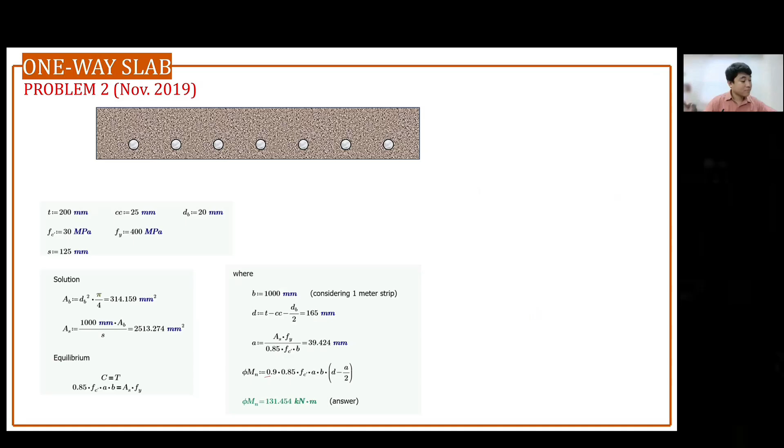Okay, ito rin yung answer doon. That's how we analyze a slab. Pinalitan lang natin yung design kanina. Given yung S, you solve the AS, and then you equate C is equal to T. Okay?

So let's proceed with the two-way slab. Okay, so design of two-way slab.

Two-way slab is when a rectangular concrete slab is supported on 4 sides and long to short ratio is less than 2.0. So it's the opposite of one-way slab. Now the deflection is on both sides, both directions, so we have to calculate the moment in both directions. Before, we just calculated the moment parallel to the short direction. Now we need the moment parallel to the longer dimension.

This is much more difficult to calculate these values of moments. The approximate analysis we used earlier is not applicable here. So we have other ways to calculate this: the direct design method for non-prestressed slabs and the equivalent frame method.

Codes from 1971 to 2014 contain provisions for the use of the direct design method and equivalent frame method. These methods are well established and covered in available texts. These provisions for gravity loads have been removed from the code because they are considered to be only two of several analysis methods currently used for the design of two-way slabs. The direct design method and equivalent frame method, however, may still be used for the analysis of two-way slabs for gravity loads.

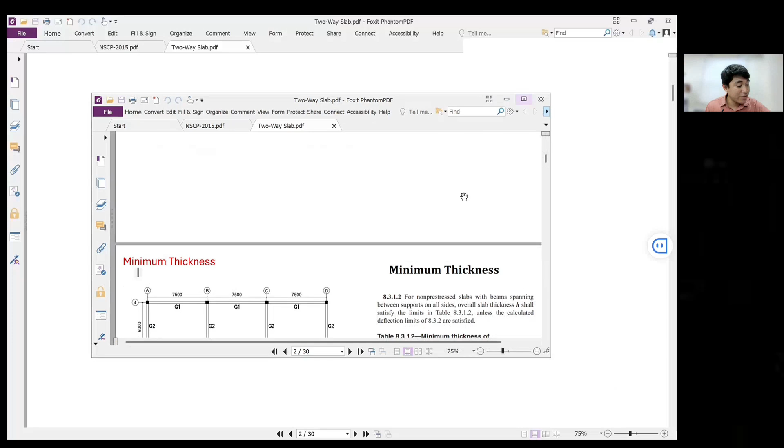That method is actually what we call... under a certain section of the NSCP. The method for slabs is different now under NSCP, so we have a separate discussion for this. It's quite long to discuss this two-way slab topic.

So it's long, we need the alpha. The solution is long. So instead of using this direct design method, we will use the coefficient method.

We will not use the direct design method. There are established alternative design ways that have coefficients so that we can easily identify the values of moments. So, class, as you can see here, we will call this the moment coefficient method.

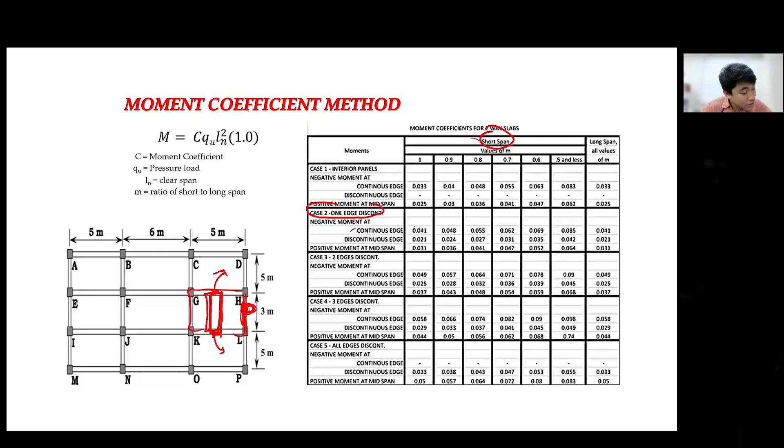So what will be the value there, this is our C or coefficient. So we need to find that out - values of M, where M is the ratio of short to long span. So, 3 over 5.

Okay, 3 over 5. That is equal to 0.6. Okay, sakto, nandiyan yan siya.

What if wala siya dito sa nabanggit? Halimbawa, yung ratio is nasa 0.67, so we are going to interpolate. Interpolate natin yung values nila. So anyway, ganun naman yung sample problem natin. So ganun lang, no? Tapos i-apply mo na yung formula natin.

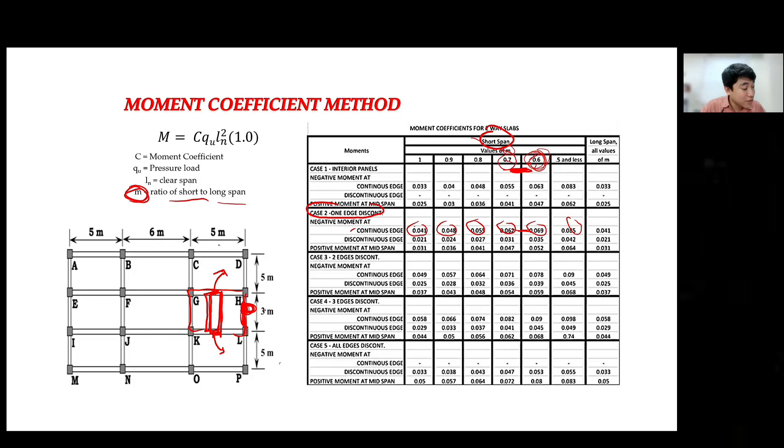Ln, same pa rin, clear span. And multiply natin sa 1.0 para maging kilonewton meter yung load. Actually, ito yung QU times 1.0 kilonewton per meter. Halos parehas pa rin doon sa approximate analysis. WULN squared, tapos may coefficient ka lang dito. Para siyang, pero kasi naka-numerator siya, kaya decimal siya.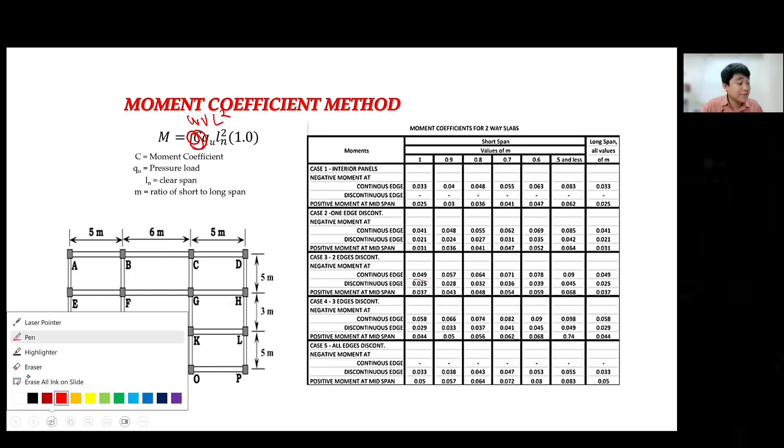So let's try to solve this problem.

The floor framing plan of a reinforced concrete structure is shown in the figure. All rectangular beams are 300 mm wide and 300 mm deep. Unit weight of concrete is 24, FC is 28, FY 345. Concrete cover is 20 mm, and diameter of the bar is 10 mm. Design EFHI. Isa lang pina-design, EFHI. Ito yung dimension natin, 7 by 5. And we have the floor finish, electromechanical, ceiling, and live load.

So first, let's compute the slab thickness. So yung formula kanina, uh, you cannot use those formulas for the slab thickness kasi for one-way slab siya. So sa NSCP, meron siyang formula for two-way slab.

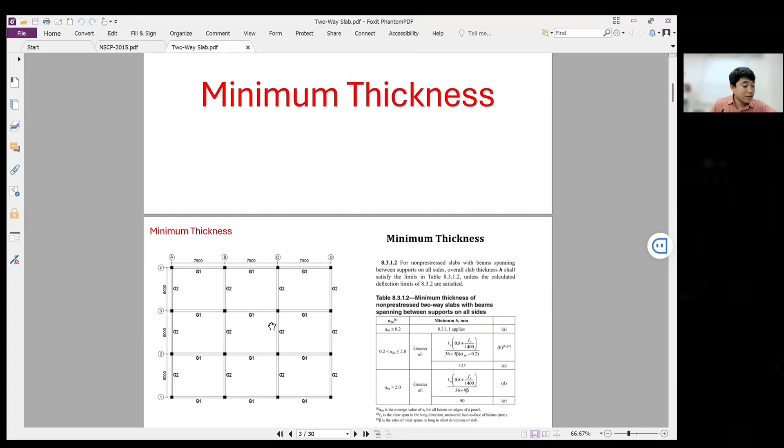Ito, medyo mahaba nga lang class, ang pag-compute ng minimum thickness of the two-way slab using this provision. Pero meron tayong shortcut. Ito na lang muna ang gamitin natin, yung shortcut. I-discuss na lang natin sa other discussion yung NSCP mismo, kasi medyo mahaba ito eh.

Siguro isang tanong na ito, isang quiz na eh, thickness pa lang eh, slab. So dito na lang. This can be still used naman pag nag-design. Safe naman yung lumalabas dito, yun nga lang hindi siya economical. Kasi pag ginamit mo yung NSCP provision, mas maninipis yung nakukuha doon. Mas economical, dito more on approximate lang siya.

This is how we solve the minimum thickness of the slab. Okay, approximate lang din to class, no? Unless we use the provisions, kasi more on experimental yun.

So this is all you have to do is to get the perimeter over 180. Perimeter of the slab that we are identifying. So this is 5,000 by perimeter neto, center to center of the beam, over 180. So that is 133. So we round up for the thickness, so we are going to use 135 millimeters.

So the M over 7, the M is 5 over 7. So we need these later for the calculation of moments for the shorter span.

0.714. So we solve the QU. QU is 1.2 of dead load given earlier. So this is, I guess, floor finish, ceiling, electromechanical ceiling, and the unit weight of concrete times the thickness of the slab. You cannot solve the factored load, QU, if you don't have the thickness of the slab. That's the first thing to do lagi, solve the thickness of the slab. Plus 1.6 of your live load. Given naman yan, so you have the QU, 12.248 kilopascal.

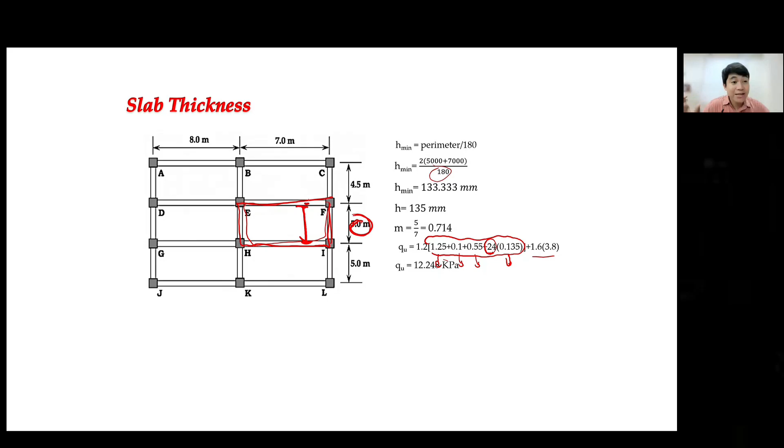So now, considering that short direction, Ln natin is 4.7 meters. Looking at the figure again, this is 5 meters. Pero yung width kasi ng beam natin, 300 mm, so dapat slab to slab lang, clear span lang. 5 meters minus 300 mm, that is 4.7 meters. Yun yung Ln na ginamit dito.

Ayan pala, so we're identifying the values of moment here, values of moment dito, values of moment dito. So we need the coefficient. Pero ang value kasi ng M natin is 0.714. Ito yung gagamitin natin, at nag-fall siya sa case number 2.

One edge discontinuous. So we need the values of moment at continuous edge. Ito yun, continuous edge, continuous edge. Then we need the moment at the positive moment sa midspan, so we need the corresponding values of coefficient.

So under siya ng 0.714. 714 is between 0.8 and 0.7. So hindi ito yung gagamitin mo, hindi ito. Mag-interpolate tayo. I believe you know how to interpolate. This is linear interpolation, no?

Yes, marunong. Okay, you can use mode 3-2 kasi linear interpolation para mabilis, no? Or delta y over delta x, parang ganun siya, no? Yung concept ng linear interpolation.

So we need the values, let's interpolate here. We need the value of m. How do we do that? So, h minus this, then 0.055 is our denominator, h minus this over 0.55 minus this. For the numerator, we have 0.714 minus this, divided by this, minus 0.7.

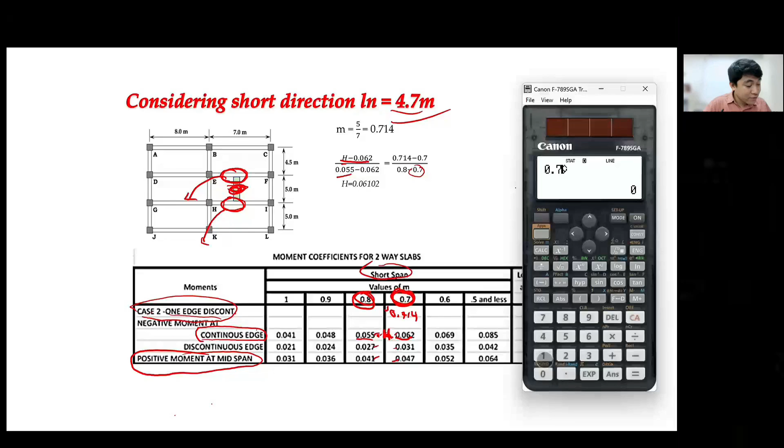Then regression, we want the value of y at x equal to 0.714. The answer is 0.046. Checking, it's close to 0.047 — correct, because 0.71 is close to 0.7.

Okay, we now have the value of the coefficient. The formula is simply coefficient times Qu times ln squared. Here, the ln squared, there's no more negative bending moment requiring you to get the average ln. There's none of that anymore, so whatever ln is, that's it.

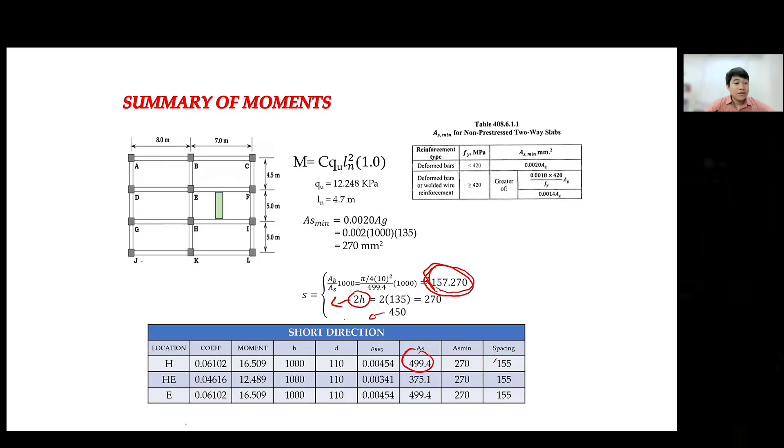There, moment is all we need. But when it comes to the direct design method currently cited in the NSCP, it's a long solution. So instead of using that coefficient, imagine this solution — this is all 30 pages. This is just one slab, guys. This is the solution for 30 slides, just for one strip.

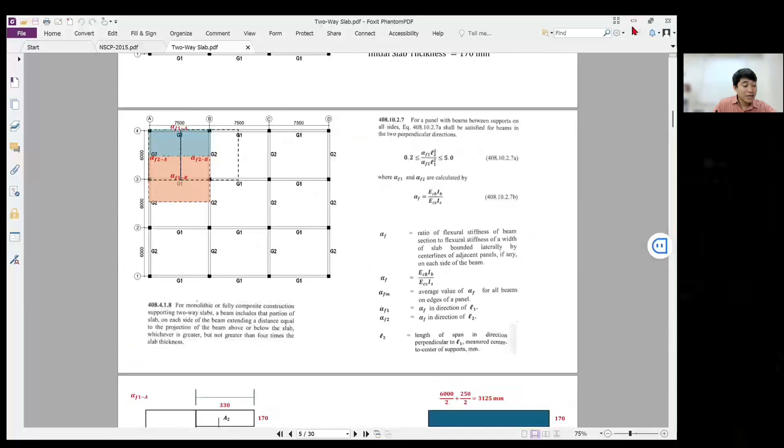One slab pa lang to, so medyo matagal siya i-analyze. Actually ano pa lang to eh, ang dinesign ko pa lang dito, yung PowerPoint na to is one side lang. Ayun, tama.

Ito, column strip pa lang, so meron pa yung mid-strip. So ganun kasi pag magde-design ng two-way slab. Anyway, so this is a separate discussion na lang for two-way slab. Baka hindi na rin natin isama sa exam yun yung ganung two-way slab na discussion kasi sobrang haba niya. Haba talaga ng solution, sobrang haba ng solution, guys.

Okay, so ito na lang ang focus natin sa exam. Pero discuss ko pa rin yun, no, yung direct design method. Again, ang focus lang nito is actually we just determine the moment, then look at the table. Given naman tong table, obviously exam. Ang hirap nito kung kabisaduhin mo lahat to.

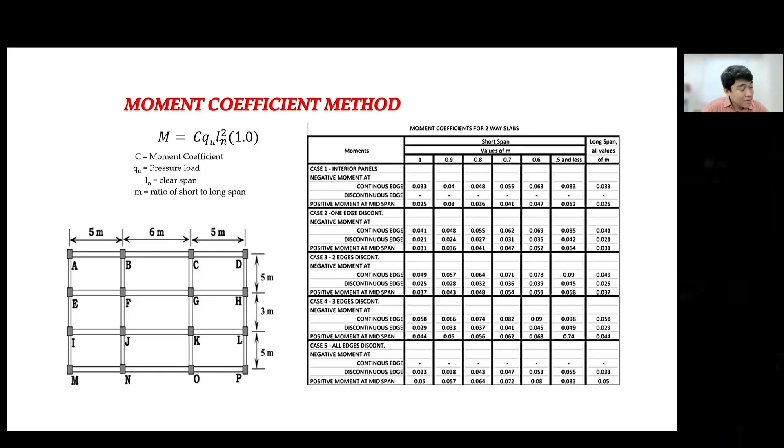Short span, we're done. Okay, next, para naman sa longer span. Ganun din, identify natin yung kailangan nating dito, madali na lang. Kasi when we look at the long span, all values of M, so may coefficient ka na agad. Hindi ka na mag-interpolate, hindi mo na i-divide yung shorter span to longer span, hindi mo na identify to.

May coefficient ka na, so check mo na lang yung LN mo. Magbabago yung LN ha, parallel to the longer span, kasi again, LN is the length of your strip. Okay, ito lang ha, the clear span of the strip. So kung 7 meters, 6.7 yan kasi deducted, reduced by the dimension of the beam. Take note of the dimension of the beam.

Nagsusupport sa kanya, so yun na mismo yung magiging factors niya. Take note lang, this is for continuous edge, asan siya, ito yun, sa E. Okay, for continuous edge, for discontinuous edge, nasa F siya, and for the mid-span, ito yun. Okay, baka kasi mapagbaliktad nyo yung discontinuous tsaka continuous edge, mid-span, positive moment doon. The discontinuous edge and continuous, sa mga edge, negative bending moment yun.

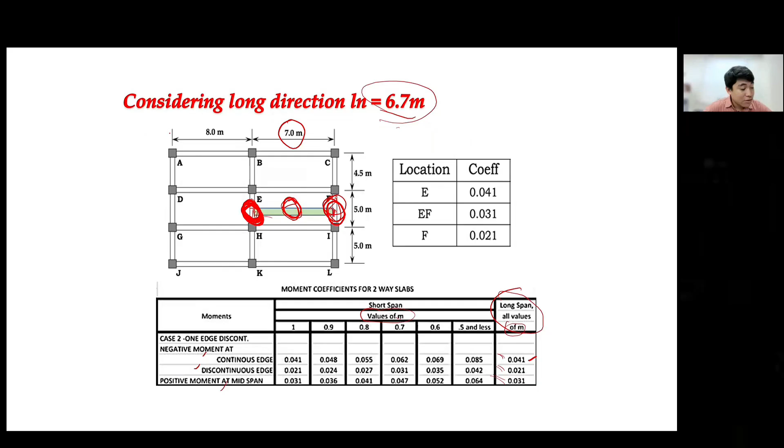Okay, now you know the coefficient. Each of them sa E, sa F, tsaka EF, sa mid-span, ito yung mga moment natin using the same formula. Okay, but different LN, take note of that, kasi longer span na tayo. So parehas natin dinidesign yung main bars sa longer span at saka sa shorter span. Walang temperature bars, okay, so walang temperature bars.

Lagi ako may pandito dito sa tanong ng 2: determine the spacing of the temperature bars. So anong sagot mo? Not applicable. Walang temperature bars ang two-way slab, kasi parehas natin dinidesign ang shorter span tsaka longer span na reinforcement. May temperature bars lang sa one-way slab. Yan yun, may points na kayo doon pag naalala nyo na walang temperature bar sa two-way slab.

Okay, walang shrinkage bars doon. So for the AS min, let's check ito yung minimum area natin. For the minimum area, pero ano ba na-solve natin dito? If you have the moment, analysis ng beam lang dito, class, ha? Similar effective depth, okay. Then may makukuha kang AS, tas kada AS, sa baba ng AS min, mag-govern yung AS dito.

So with that, ang spacing niya, gamit na itong 691, 691 ang kinuha natin dito. Magkakaiba-iba yung spacing ng midspan, discontinuous and continuous. Pero we want to have a uniform spacing all throughout the length of this longer span. We want to have similar spacing, kasi pag iba-iba yung spacing yun, yung bakal mo mapuputol-putol. Para kang nag-design ng beam, putol-putol yung bakal.

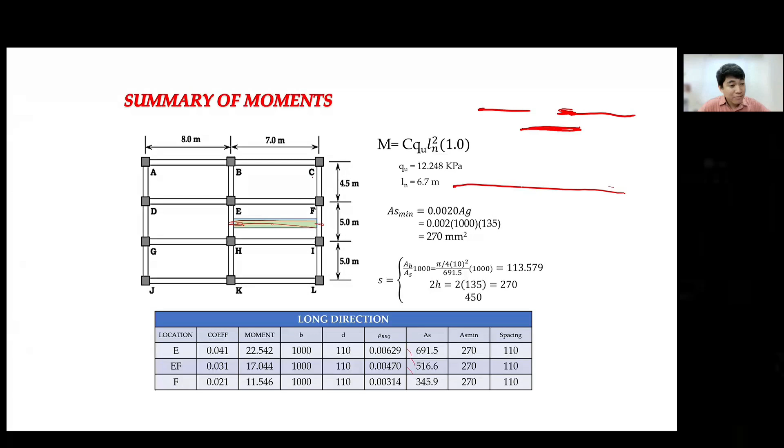Para kang may bigat, mahirap gawin sa construction, marami kang putol. Unless i-bend up mo na lang siya, so meron kang bakal. Ang ginagawa dyan ng mga steelman, inaangat na lang, i-lay mo na nilang nasa bottom bars, tapos bigla nilang i-bend up to. So aangat na yan, mas madali siya sa construction, so i-bend na lang nila yung pataas.

Anyway, ang spacing dito, class, with the 691 na AS is 110, kasi 113, round down, so ang governing spacing, parallel to the longer span, is 110. Kanina sa longer span, so ito yung detailing natin. So for the detailing, parallel to the short span, 10 mm at 155 on center. Sa parallel to the long span, 10 mm at 110 mm on center.

So pag ginawa siya, ang one-way slab class, ganito, no? Ano dyan, nakasunod sa kanya yung temperature bars, susunod lang. Parallel to the longer span.

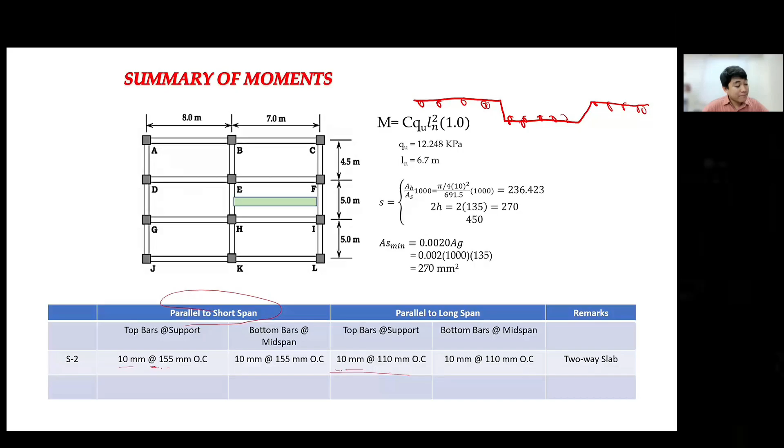Pero ang two-way slab, may paganito ka dito sa short direction. Gagawin natin siyang 3, meron ka dito paganyan. Tapos sa long direction may paganyan, meron paganito rin sa short direction. Ganyan yung detailing niya. So bababa dito, so ganyan yung detailing sa two-way slab. Naka-drop yung sa gitna ng midspan sa mga support sa taas.

Okay? Ayun, that's how we detail. That's it now for the design of two-way slab.